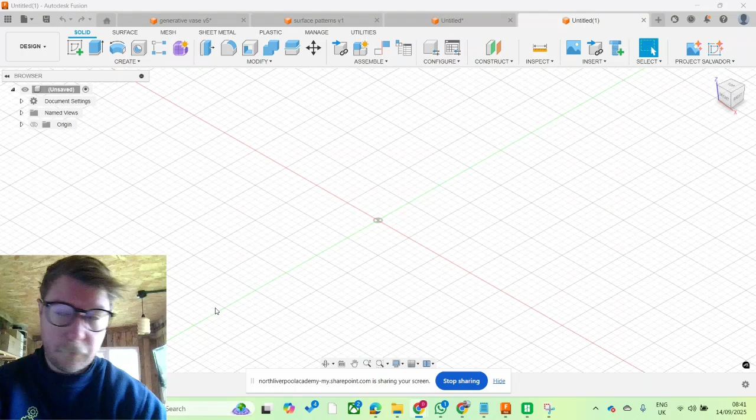Okay, so in this video here, what I'm going to do is I'm going to do a little bit on surface texturing. Now, I've really enjoyed 3D printing because I'm dead cool. But quite often what I want to do is I want to put a surface texture onto my 3D model. And Fusion has not allowed me to do that until now. So I'm going to walk you through how to do that.

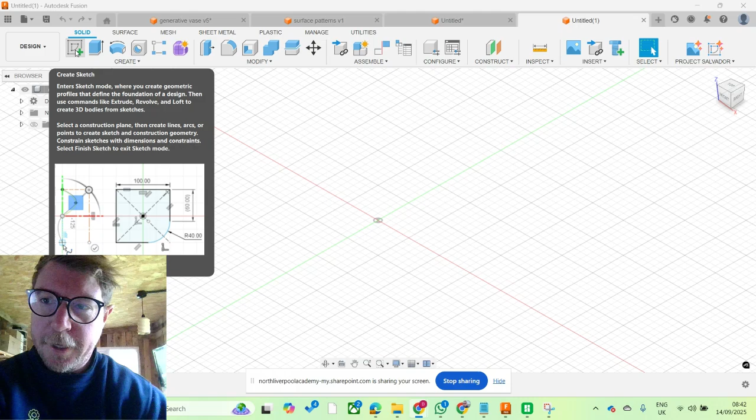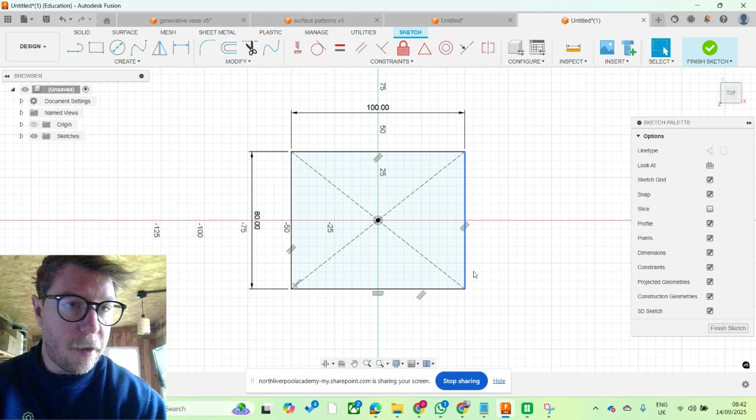So for this purpose here, I'm just going to make a rectangle, right? Obviously, if you've got your own model, use that. But I'm going to create just a rectangle here on the base plane. I'm going to create rectangle, center point rectangle, and I'm going to choose this here. For the purpose of this, I'm going to make this 80 tab 100, and I have got my rectangle. If I click finish sketch, everyone's happy. If I press extrude, I can now extrude this by 10 millimeters. Okay, so that is my base model.

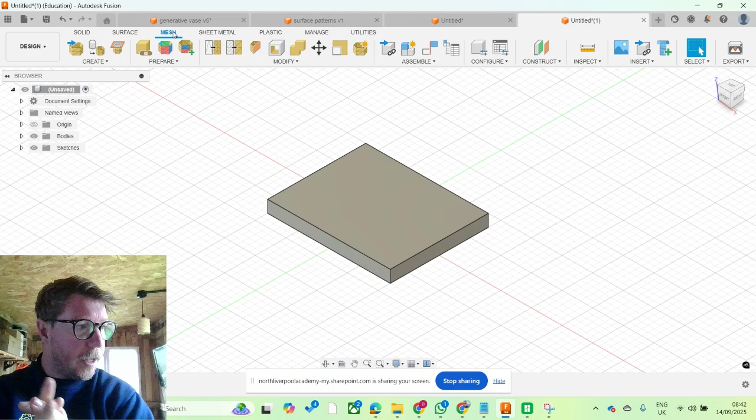Now, at this point here, if you want to provide the surface texture, it only works in a mesh. Now, this is quite good if you've maybe downloaded someone else's model or maybe a shareable model. You can simply apply your surface texture to that STL or whatever it is that you're working with. In my instance here, I'm going to create a surface texture on top of a model that I've modeled in solid model. So what I've got to do here is I've got to turn it into a mesh.

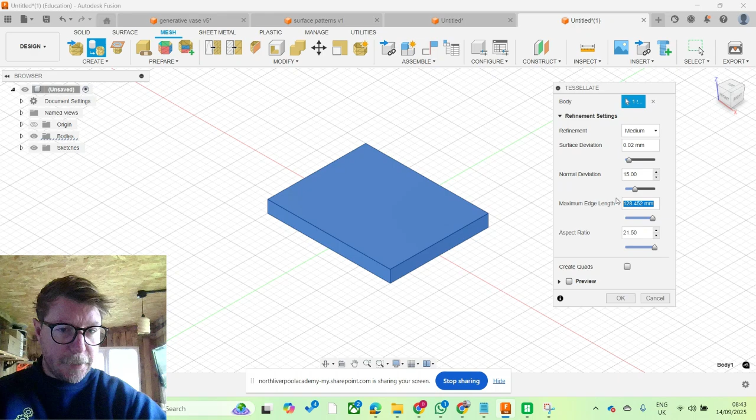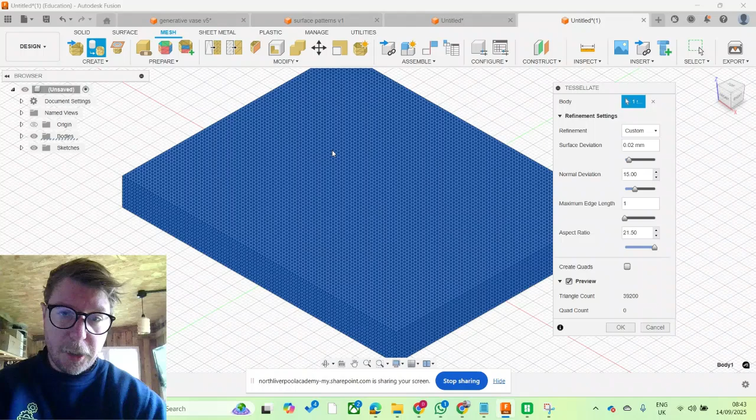If we go to create, I can choose the tessellate option. I can choose the body. And the only thing that's really important here is the maximum edge length. If I put 100 in here, and if I click on preview, you'll see that I have got this shape here. Now, that's not going to work very well for me. But if I turn this down to 1, all of a sudden you'll see that I've got all these vertexes there and all those faces, which is the option that I want to have, because the way that it's going to construct the image is using these different edges. So I'm going to click OK.

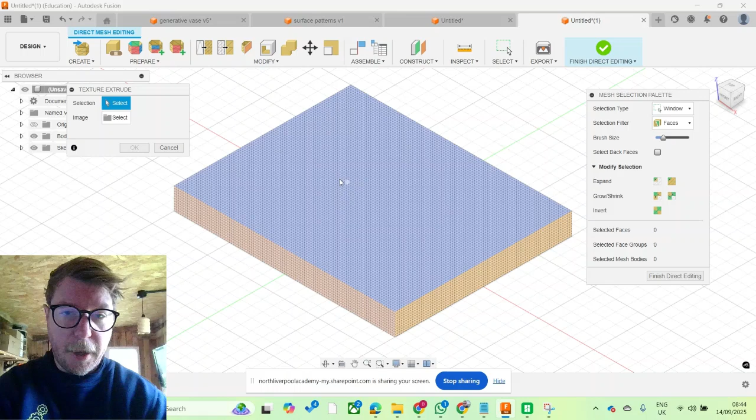Now then, if I come across to modify, what I can do now is I can direct edit this body, and I'm going to select it and I click OK. It's going to bring me this option here. Now, this then allows me to, again, modify it. And when I do this here, I've now got this texture extrude. If I choose texture extrude, what you'll see is I can then choose what I am going to select. So if I change this from faces to face group, I can now just select the face group. Obviously, you can see that I've got the paint option within there as well, and I can play around with this myself. I've just chosen the face group.

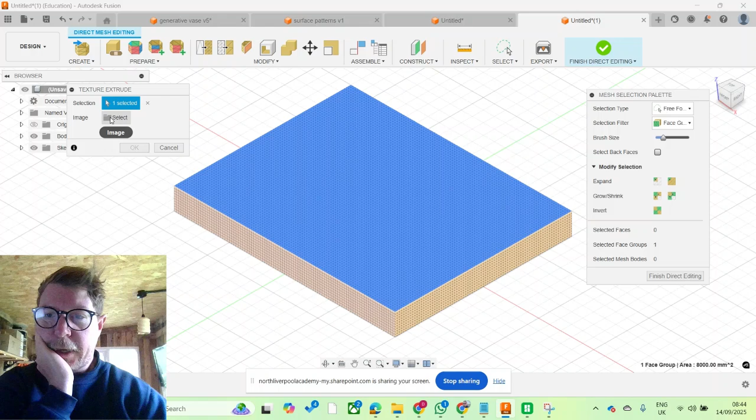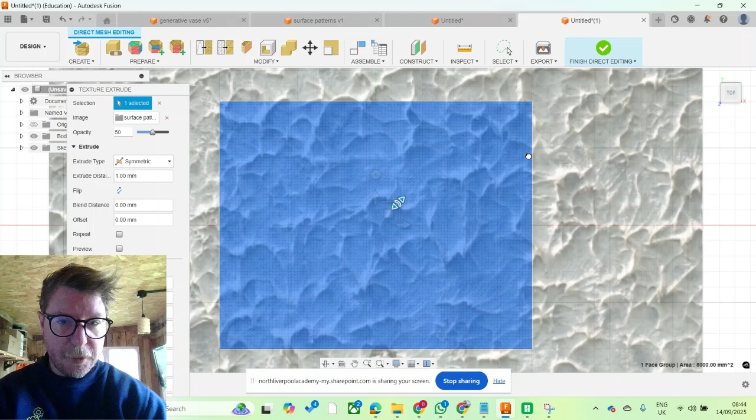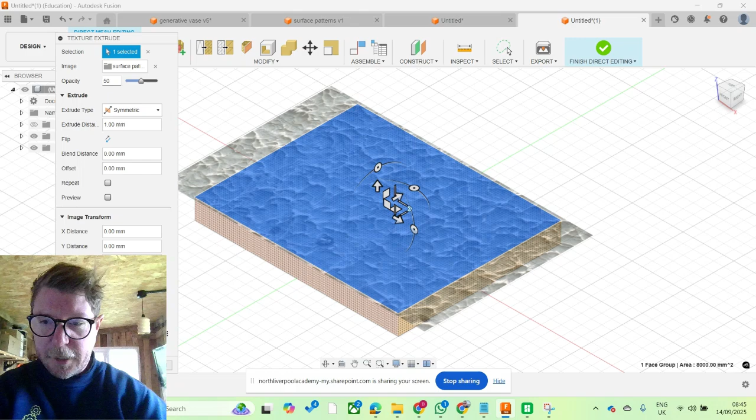And what I've got now is an image. I'm going to insert this from my computer. It is in my downloads, and I have got a PNG of a surface pattern that I have found on the internet. Now, you can play around with all sorts of these things here. For me, I'm just going to drag this out until this surface texture covers the area that I am trying to pattern. Now, the only thing that I've been really changing here is my extrude distance. So that's how far it's going to lift up the surface texture. So you've got all sorts of things to play around with. I've played around with little bits of these, but what I've got here is okay. So all I'm going to do now is hit OK.

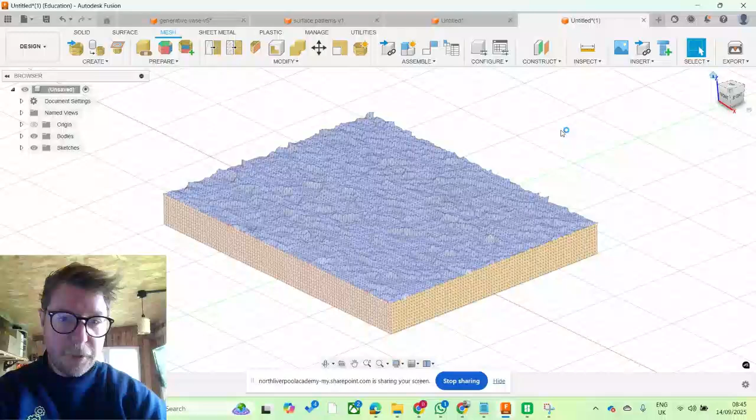And you have now got this lovely surface pattern, surface texture. I can click Finish Direct Editing, and I have now got my surface texture and my surface pattern applied to my face. And obviously here, it'd be almost impossible to 3D model this, right? But it is quite cool, and therefore, happy days. Everyone is ready, and I can 3D print whatever pattern I can find. Be creative, have a play. And from here, you can just export this, or you can 3D print, or whatever it is that you want to do.

But yeah, that's surface texturing. Loads of fun. Happy days. I'm happy my 3D prints are going to be leveled up, and I hope yours are too.